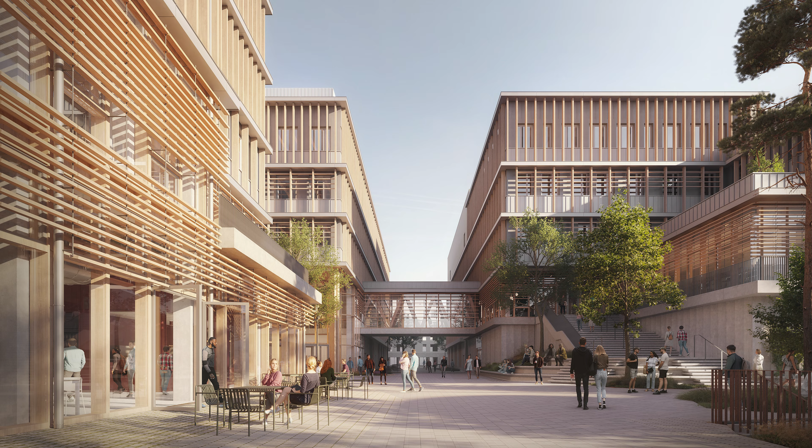The Campus Santé Franceline-Ribard project is quite special and innovative. The first of its kind in France, even in Europe, it aims to bring together the full range of healthcare training programs in a single institution.

The Nantes University Hospital Center, a new healthcare district, will include all human and animal healthcare schools and faculties.

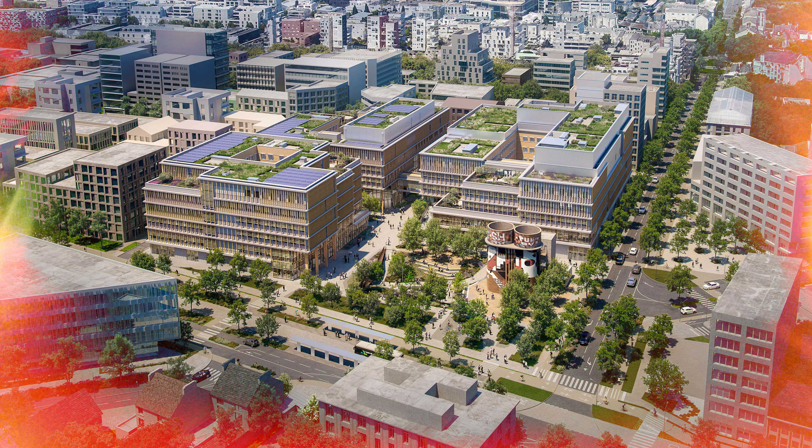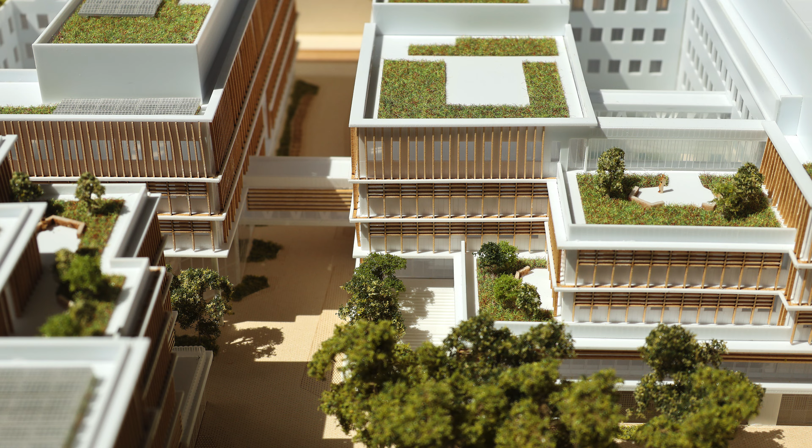The university campus is on the island of Nantes, very close to the future university hospital complex currently under construction. It will work both with the university hospital and the rest of the district, since the city of Nantes aims to create a healthcare hub of excellence around this university hospital project.

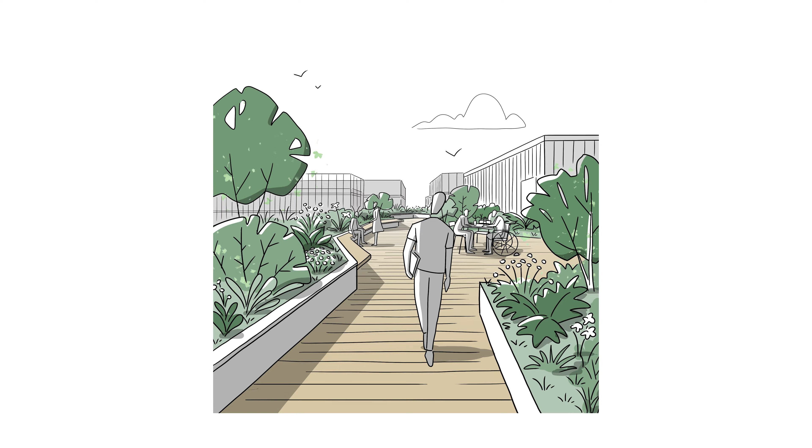The special feature of this project on the island of Nantes is the integration of mobility from the start, with the creation of a large green corridor for bicycles and pedestrians. It's an area of 44,000 square meters, on which there will be 3 buildings.

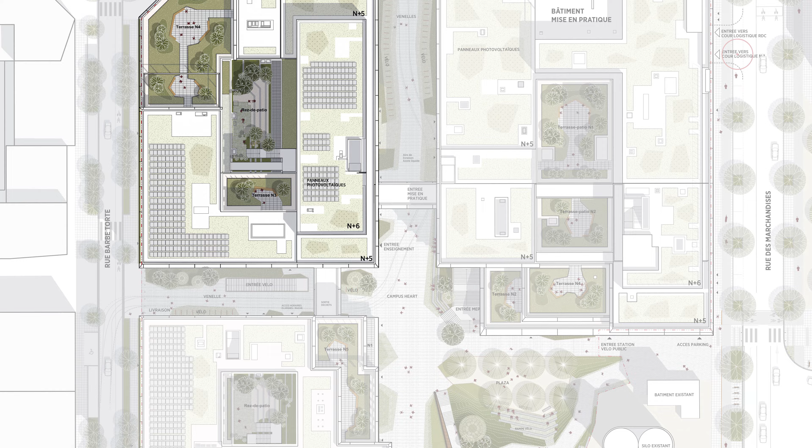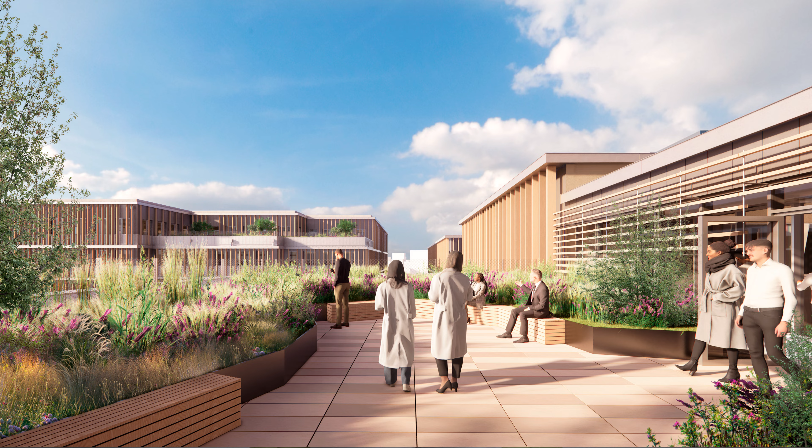There's the Campus Life Hub, with student and faculty living quarters. Next, there's the Teaching Hub with all the standard teaching facilities and lecture theaters. Then we have a more technical building called the Practical Training Hub, with simulation facilities, since medical studies entail simulation of doctor-patient relations and performing dissections, hence a simulation and research section.

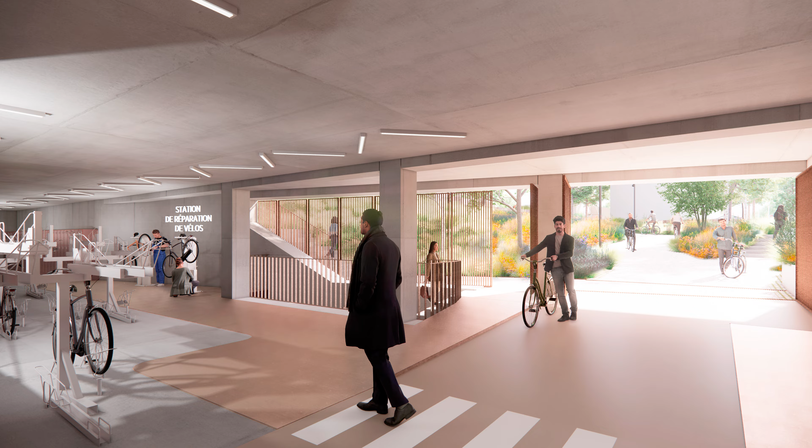The practical training hub also includes a university canteen serving 2,200 people a day that will serve students at this and other universities in Nantes.

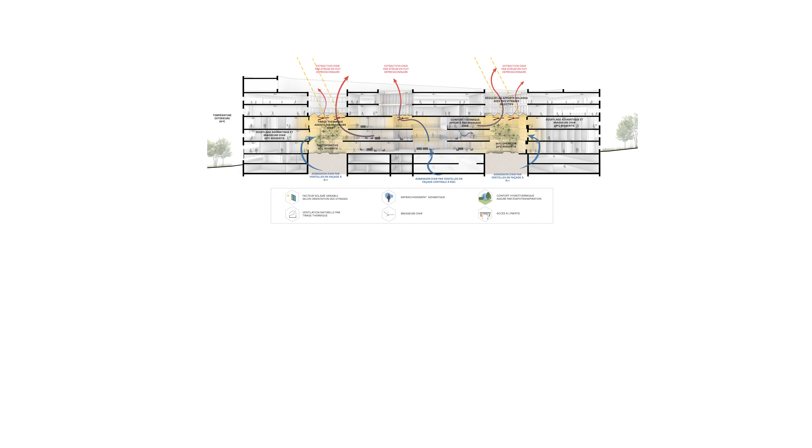It is a real place of the future for our children, designed to be hospitable, welcoming all those concerned and enabling them to work and live very complex situations with greater serenity. That's why we're so fully committed to this project.

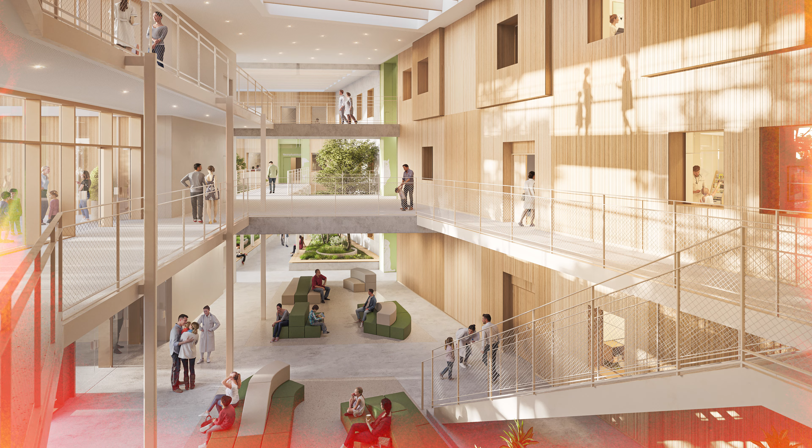The Children's Brain Institute is a very special project. Like the previous project, it's a first in the sense that this is the first time we are grouping together these programs in a single building.

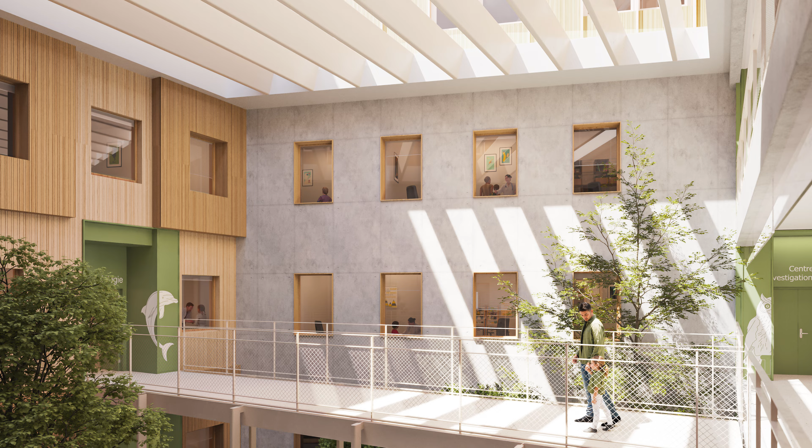We have children with brain-related conditions and their caregivers, of course, even if this facility is not a healthcare facility proper, but rather a diagnostic and research facility. So you have child patients, caregivers, applied research, and basic research all in a single facility, which itself is an extension of the Robert Debré Hospital in Paris.

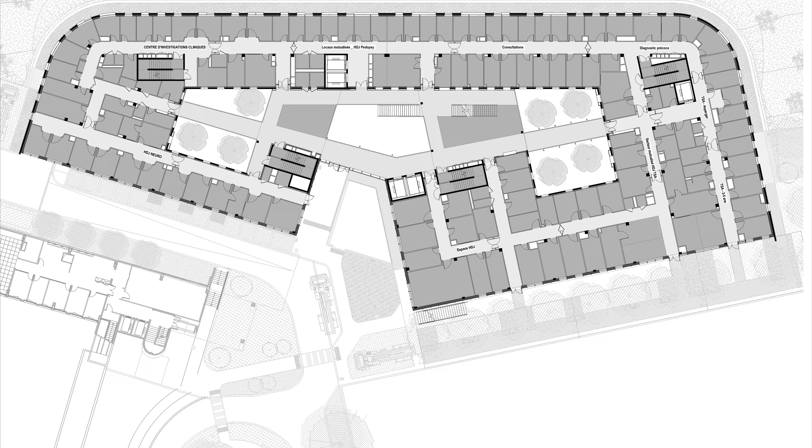It's also a very unusual site, wedged between the existing hospital, the ring road, and the city of Paris's drinking water reservoir. So it's a very small site. In fact, my first visit was a real surprise, a site running along the ring road on a slope allocated to a facility for children with health issues.

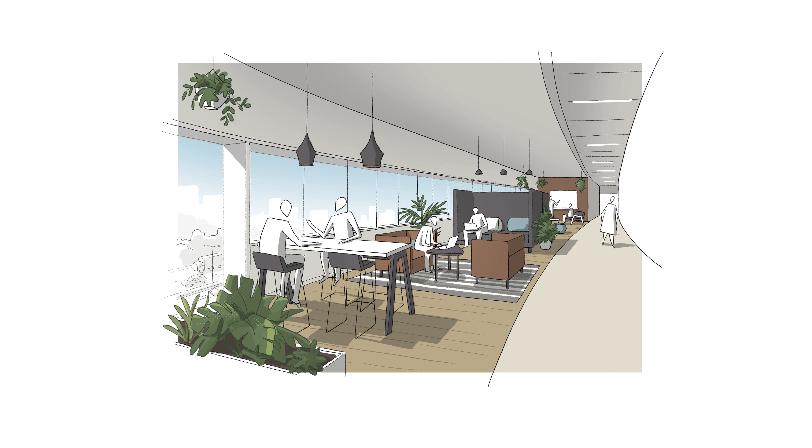But very quickly, our vision of the project design for the site took shape. We wanted to take advantage of the project's location in relation to the Ring Road, City, and Outer City district to enhance its visibility and also create a landmark.

So, the elevation facing the Ring Road has a very distinctive carved decorative effect that makes you wonder what's inside. It reminds some people of a brain.

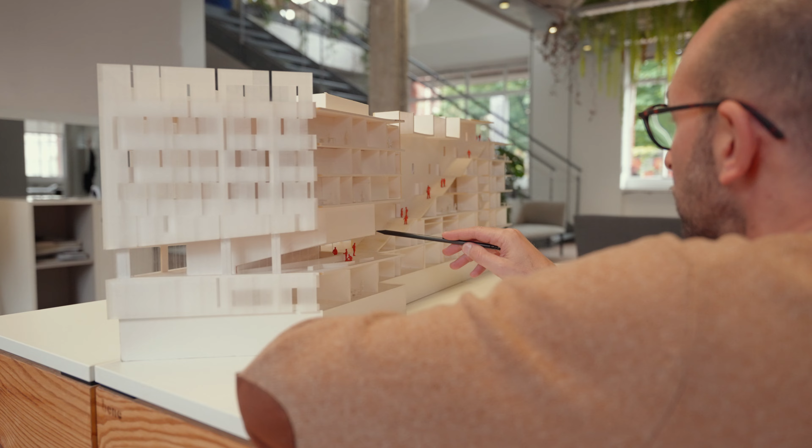The AIA Foundation was created in 2011 by the architecture firm AIA Life Designers. The company's goal is to conduct research in 3 areas: architecture, health, and the environment. Why these 3? Because we realize that health is a major factor in the equilibrium and well-being of populations.

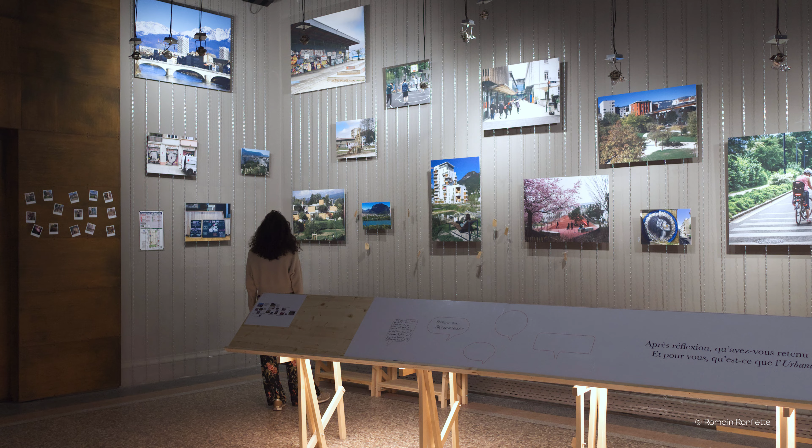The AIA Foundation is therefore a research platform that also looks into the subject of collective health. Although today we talk more about well-being, it's important to note that our research is mainly into the evolution of project methods - how a firm of architects, engineers, and urban planners decide at a certain point to address the question of public health, not simply in response to a hospital building brief, but going beyond that to consider achieving objectives like those defined by the WHO. This is particularly true when considering the families of health determinants.

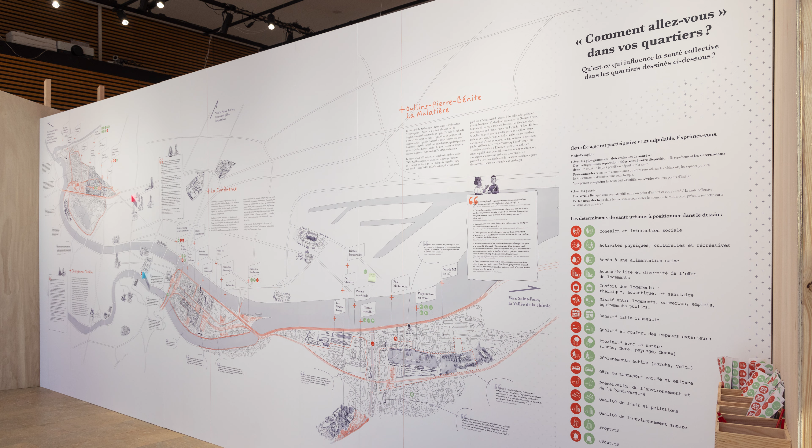Nor do we keep this knowledge to ourselves. We share it in the format of an exhibition called Comment allons-nous? How are we doing? That will be touring different regions. The exhibition was first shown in 2021 at the Venice Biennale, and subsequently in other regions. It is currently being presented in Lyon, sponsored by the local CAUE, the Architectural, Town Planning, and Environment Council, an organization concerned not only with involving the general public in questions of collective health, but also with showing how architects, designers, and landscape architects must themselves broaden their approach and include consideration of well-being and health.

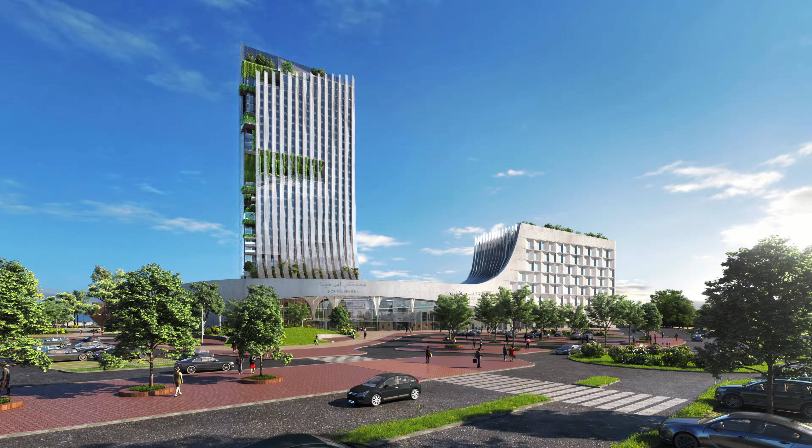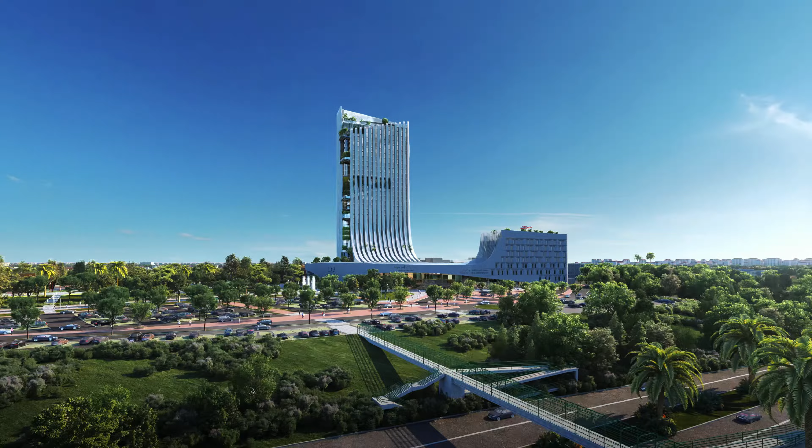For AIA, health issues cannot be resolved or merely summed up as a matter of finding a place where the sick are cared for. It's not just that. For AIA, it's about a truly comprehensive health project that includes physical, mental, and social health. It's an inclusive dimension involving creating spaces that will enable people, as far as possible, to feel better and get better. Developing an overall design concept is at the heart of these projects.

The IBN SINA project in Morocco is the second major project we have been asked to design in Rabat.

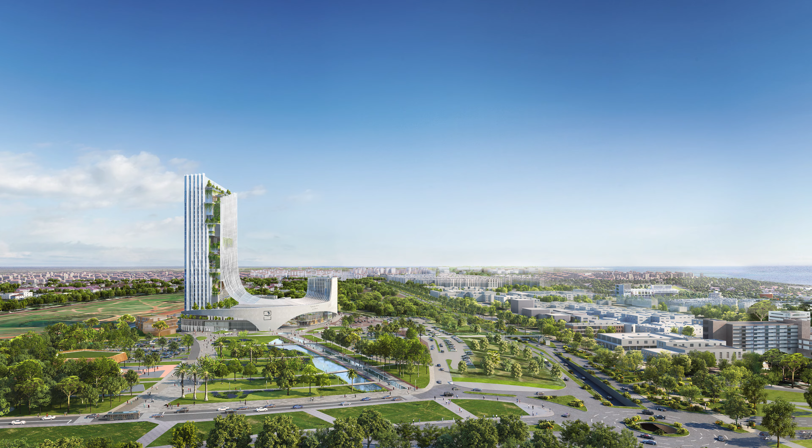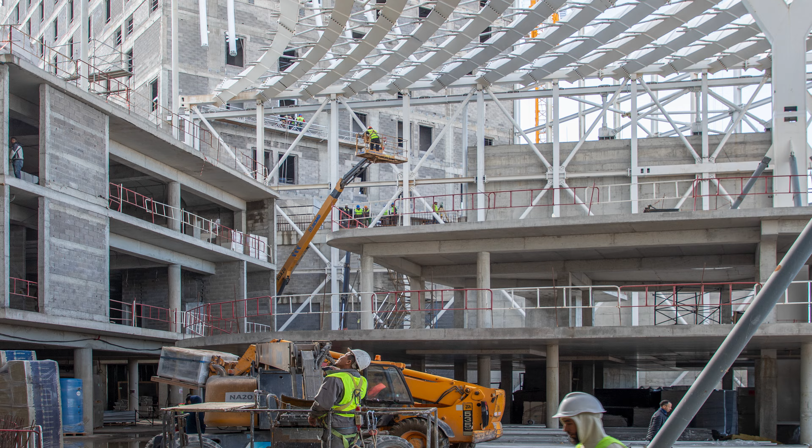It's a 280,000 square meters hospital located in the center of Rabat. It marks a truly decisive moment in AIA's international development. It is a very special project, entailing a fairly complex programmatic healthcare requirement - building a hospital in a tower, a program that does not necessarily lend itself to this typology. Why a tower? It allowed us to resonate with two other towers already in the center of Rabat and create a distinctive skyline with key landmarks for the whole city.

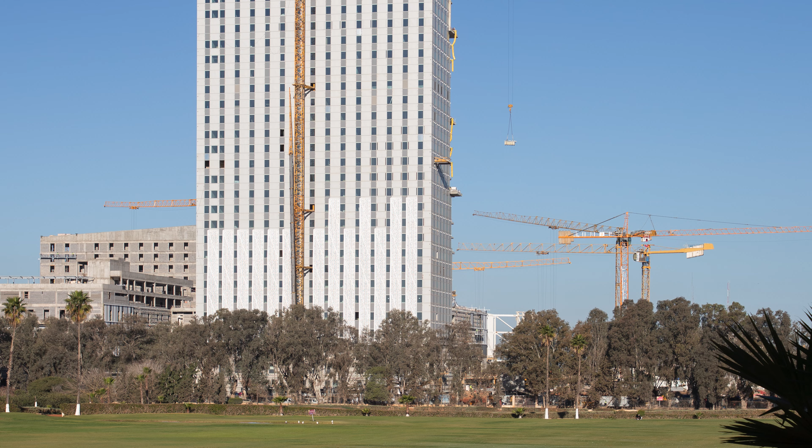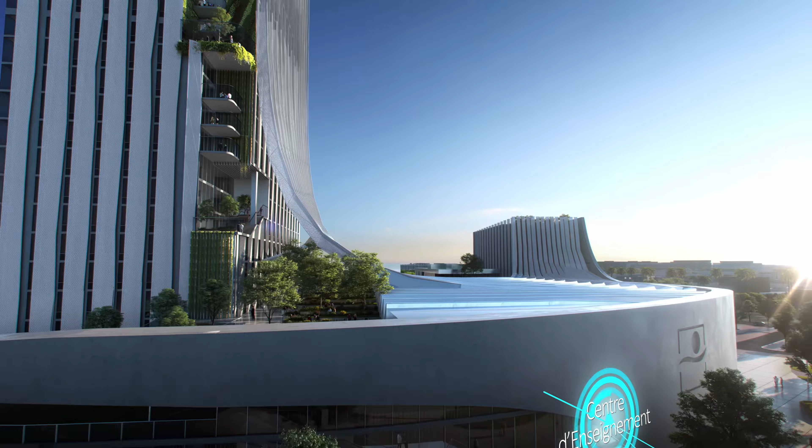However, you can't just build a healthcare tower with a series of pertinent programs and not include other elements. How do you ensure that this tower is different from an office tower? Our main answer was to create a continual green strip up the building. The tower opens out towards the city and the sea with a green continuum that starts from the landscaped approach to the Ibn Sina Hospital and rises up through the full height of the building through all the floors, opening up the tower to the urban context.

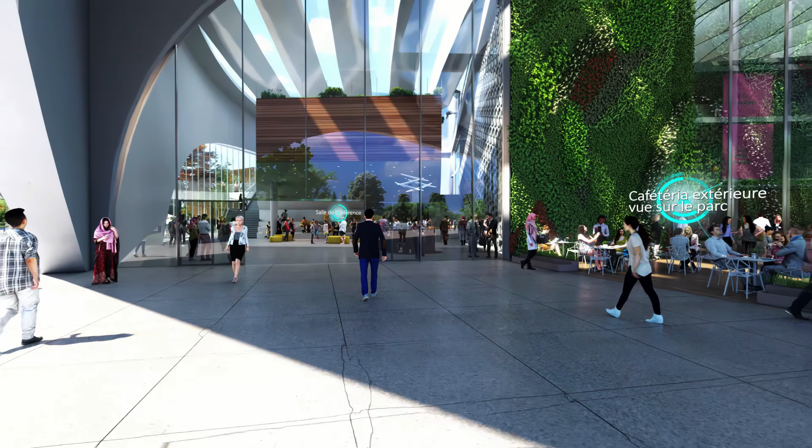This project will be both a hospital and a university where patients, researchers, and clinicians come together to provide innovative medical treatment in Morocco in the future.

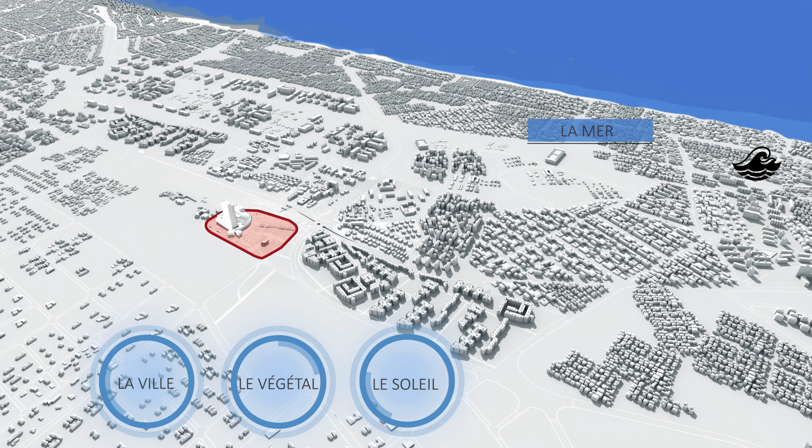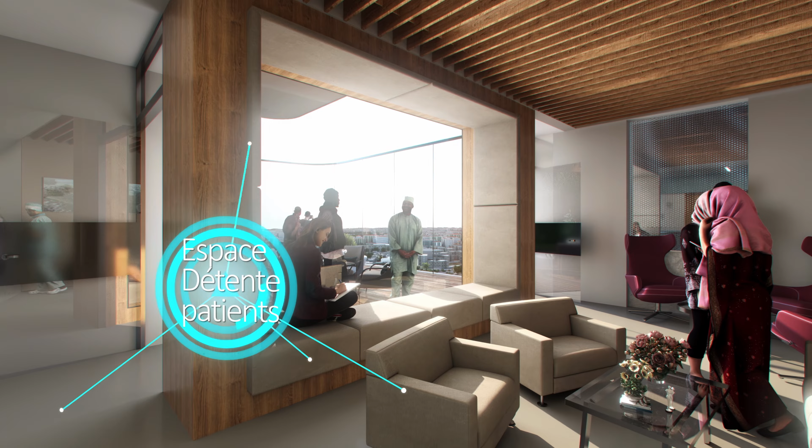The IBN SINA Tower was conceived to fit with the climate and the environment close to the city of Rabat. We talked about this green continuum that faces the sea and the city, but it's also a sensory design. On each level of the tower, this continuum of natural greenery mounting the facade allows people to step outside for some fresh air and enjoy a moment of relaxation.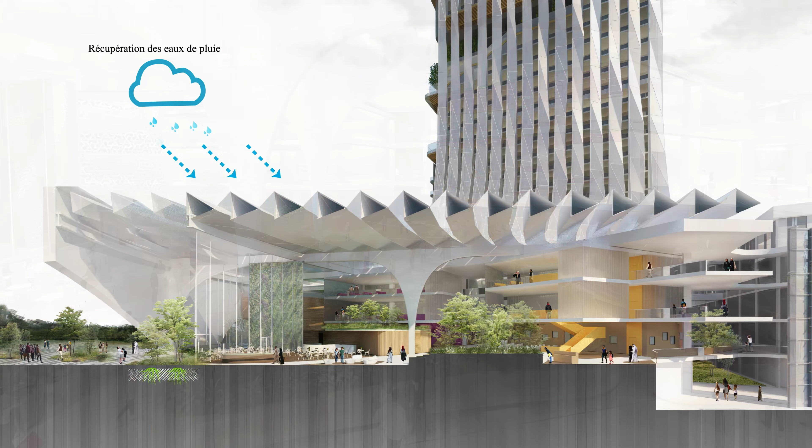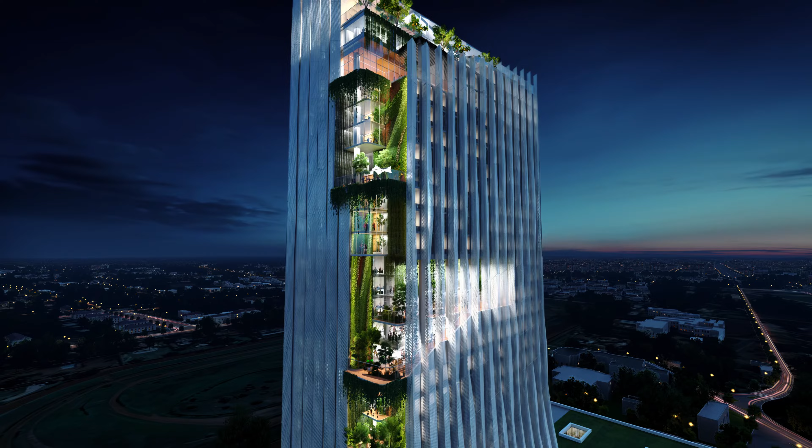The tower is characterized by its kinetic envelope that accompanies the facade from the main hall up through the full height of the building. In fact, the envelope can be described as an active skin - so much is going on. It allows natural ventilation, windows can be opened. The fact that you can open the window on any floor and get some fresh air is a strategic feature of the whole program. It's part of the sensory design to be able to know what the weather is like outside, what the temperature and humidity are at any given moment.

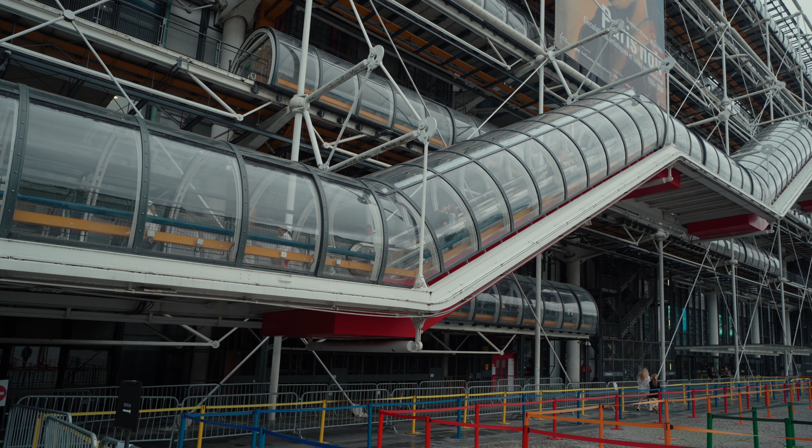The Centre Pompidou is evidently a hugely iconic project in Paris. A museum project where we are assisting the client with the renovation of this heritage site. It's really significant for us as architects to be involved in the project and work hand in hand with the Centre Pompidou teams.

Our work on this project consists of renovating all the facades, all of the networks, and reinstating the project to comply with safety, fire, and equitable accessibility standards. So it's a fairly complex, comprehensive brief involving all aspects of the building.

The centre will close for several years, during which we will take over and renovate it. We will give it a new lease of life for the next 50 years. By completely renovating all the mechanicals, plant and facades, we will allow the centre to look to the future as it was built, as Renzo Piano said, to last 500 years.

We don't claim to be building for 500 years. But what we do notice is that this building has many qualities, and that with new materials and today's technologies, we will be able to project it into the future and allow it to continue its mission of public service and culture for at least the next 50 years.

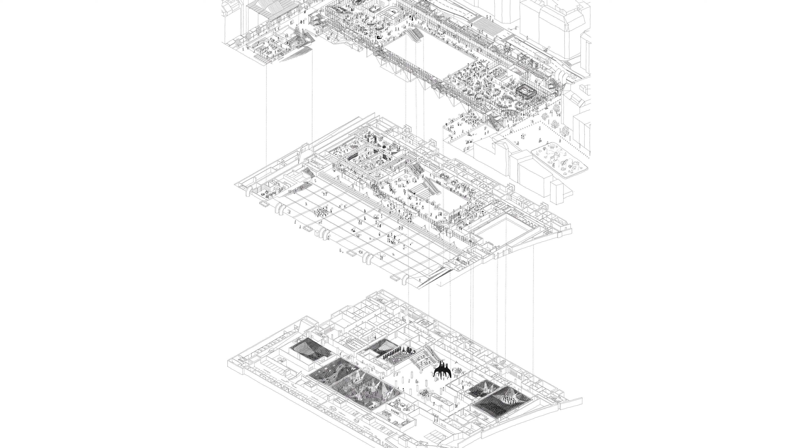It's such an extraordinary building that when you first approach it as an architect or engineer, you freeze a bit thinking, oh boy, what I'm doing is sacrilege. But we quickly got over that by adopting a method that ultimately involves embracing the philosophy of the original designers, which is to do something that is truly innovative while preserving everything that makes up the centre's DNA.

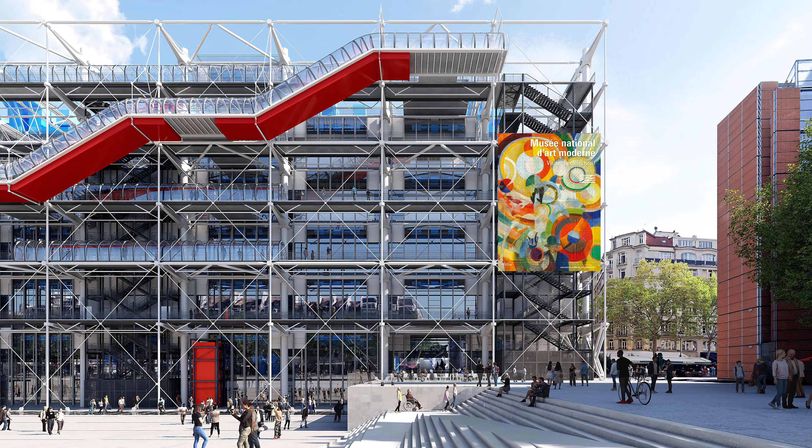Here, for example, we have a section of the facade. These elements are found every 1.25 meters and are 7 meters high. They are called stiffening columns and serve to reinforce the facade from the outside. They're a prototype and exist only at the Centre Pompidou and nowhere else.

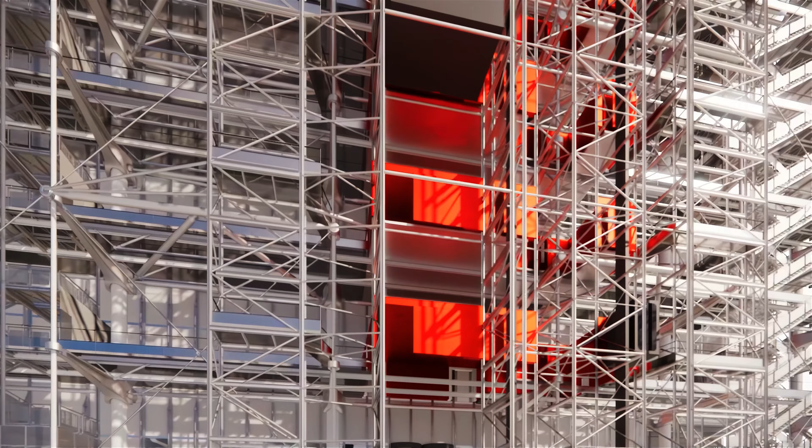The facades are no longer compliant, misted over, sometimes containing asbestos. Our job will be to restore and reinstate them. To do so, we'll preserve as many components as possible: the stiffening columns, what are called the U-profiles here, and the anchoring pieces made especially for the operation.

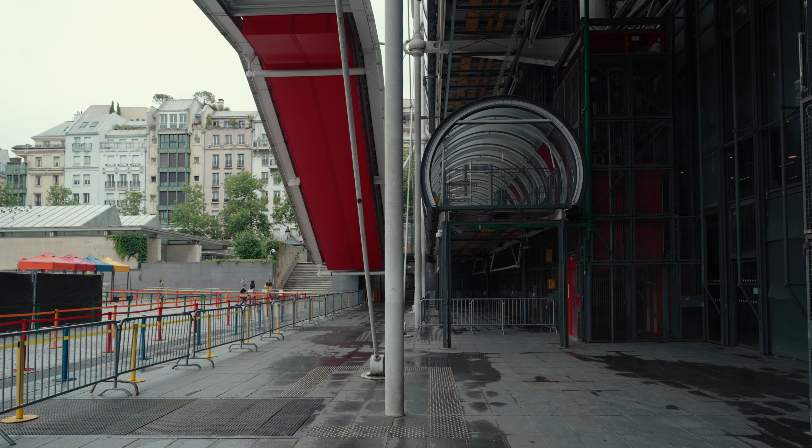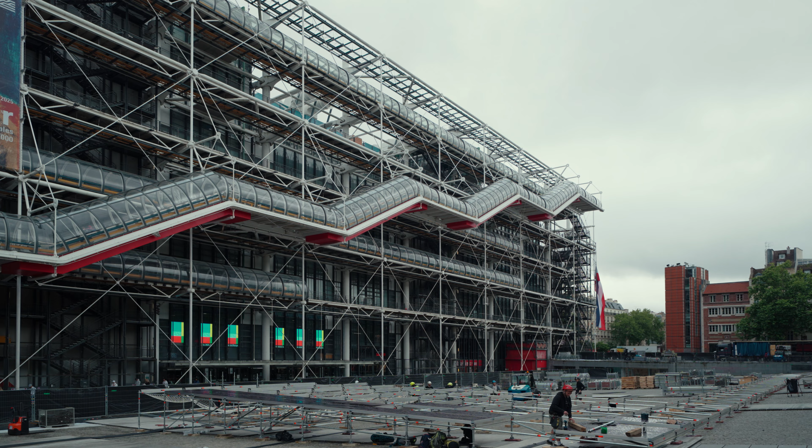We're going to remove the glass and replace it with today's new high-performance glazing, at the same time taking the opportunity to clean all the joints and anything that may contain hazardous materials. These are some examples of the work we'll be doing on the centre, preserving as much as possible. All these elements are in very good structural condition, and we'll replace only what needs to be replaced.

Today, architecture is undergoing a major paradigm shift. The city is already there, and we have to rebuild on top of it. That's one of the main challenges facing the environment. It's about working with what's already there, building the city on top of what's already there to regenerate it. This is how we try to bring a new perspective to our projects.

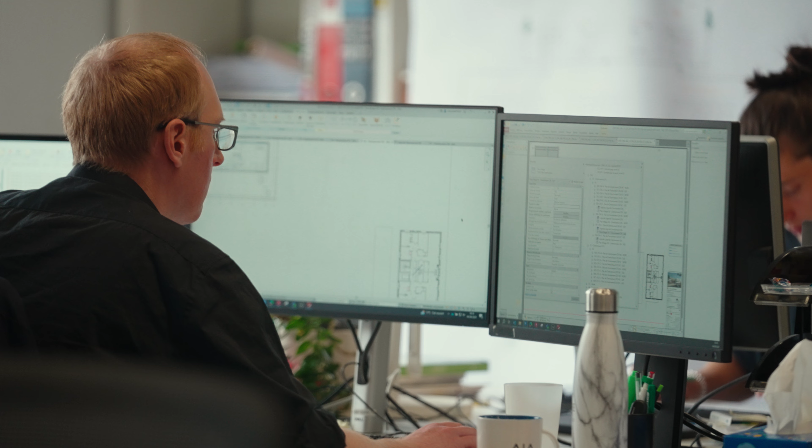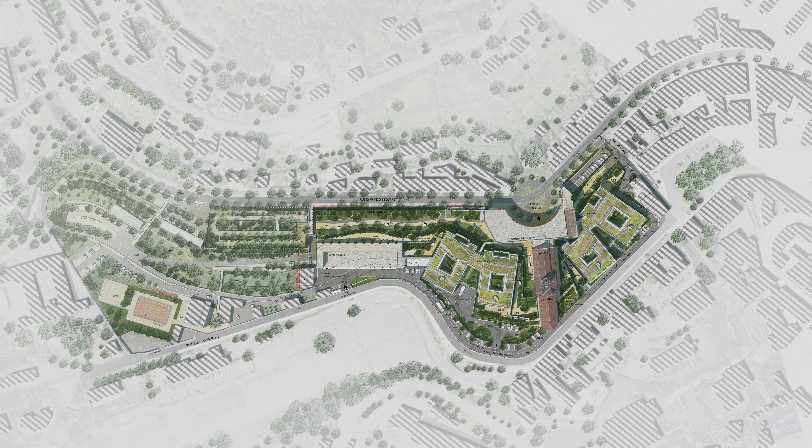You could say that it's a co-design project with an architect who came before. It is like going back to the past. I find that fascinating because discovering the work of another architect is culturally very interesting. You delve into the history of architecture, the approaches to design, methods, and construction techniques. You learn a lot—it's really a question of dialoguing with a work that has already been created.

Today, we are organized around units grouped around AIA Environment, which allows us to address these issues in all our projects, whether they're certified or not. Today, our environmental engineers are involved from the get-go, from the very first pencil stroke.

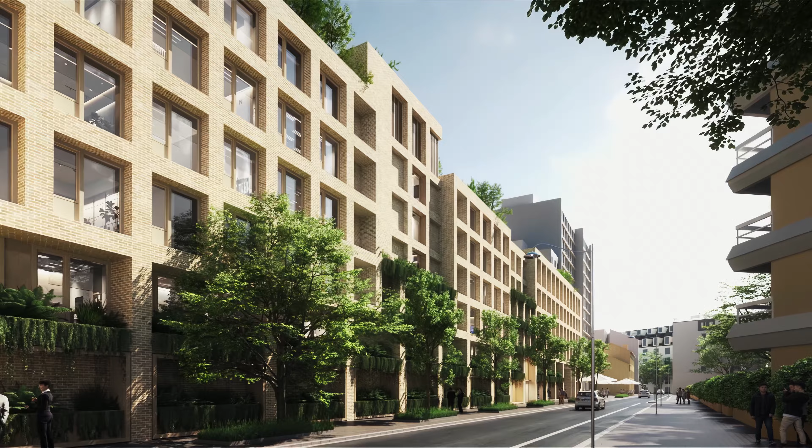The DRIEAT project on Rue Miollis in Paris is a major urban regeneration project where we have to rebuild on what already exists, work with what's already there. It's a project that sums up the future of architecture very well.

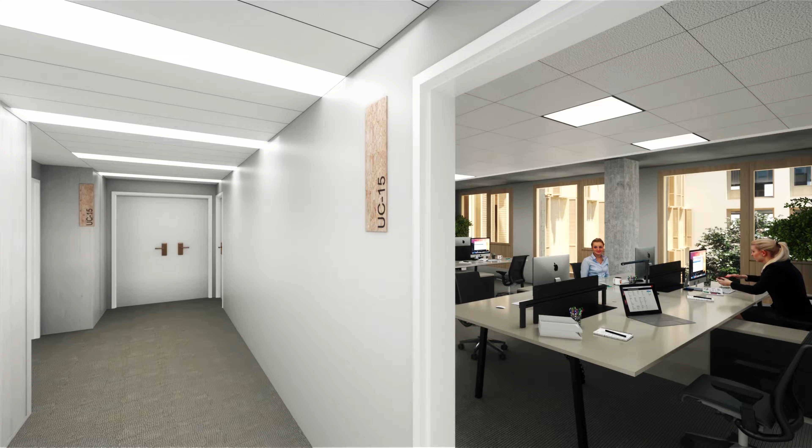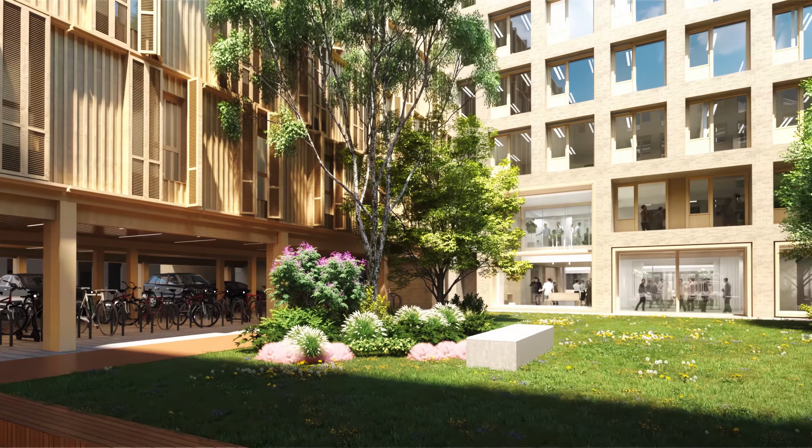There are 3 objectives. There's the concrete goal of modernizing the building, especially in terms of energy efficiency, consumption control, and systems to meet tomorrow's environmental requirements. There's the question of occupant workplace comfort—that's the second major objective. And then there's also the broader urban issue of renewing the image of this administration and its dialogue with the city.

And around these 3 major themes, there's also an important focus on densification. Today, there are around 600 people working on the site, which will rise to 1,000. So densification and, at the same time, high environmental expectations.

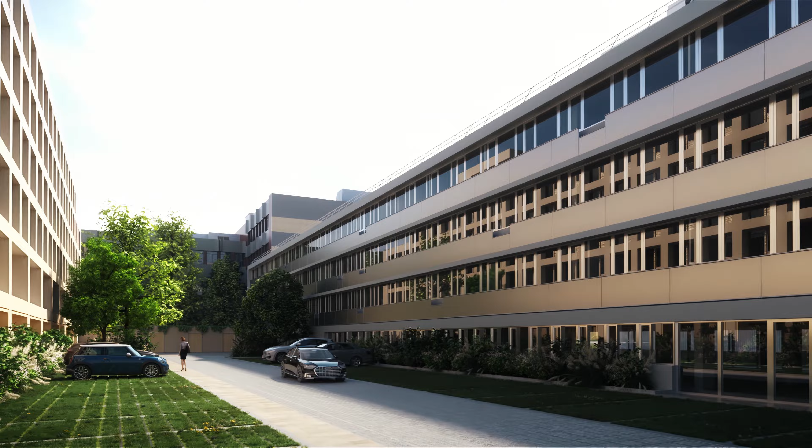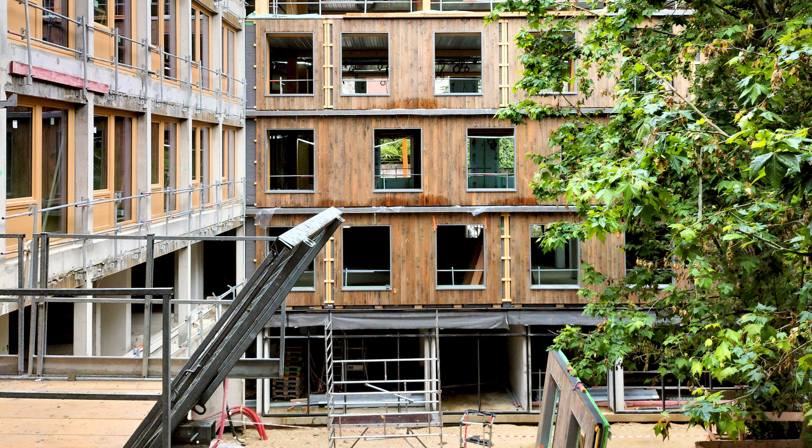There's the existing part and a new part, an extension. For the new build, we have implemented very low-carbon construction principles using wooden facade frames with wooden cladding and bio-based insulation. We have deliberately set ourselves a very ambitious goal in terms of materials and construction techniques.

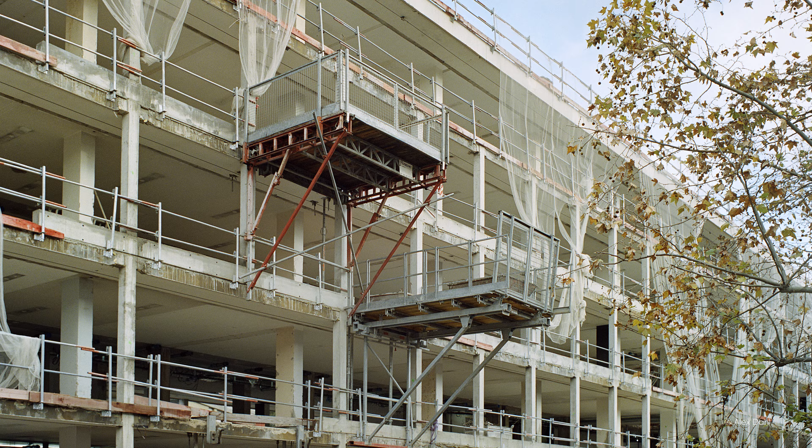For the existing part, the goal was to retain almost all of the existing structure, reusing what was there and not deconstructing or demolishing anything, rather enhancing as much as possible. We again used bio-based materials and generally implemented low-maintenance air filtration, heating and cooling techniques, and passive and low-consumption systems to have a building with really low running costs.

The CNAV project, the National Pension Fund, is a renovation project covering more than 20,000 square meters in Paris, part of which dates back to the 19th century, the other part from the 1950s. This is another large-scale regeneration project working with existing structures and addressing issues such as energy consumption and creating new workspaces.

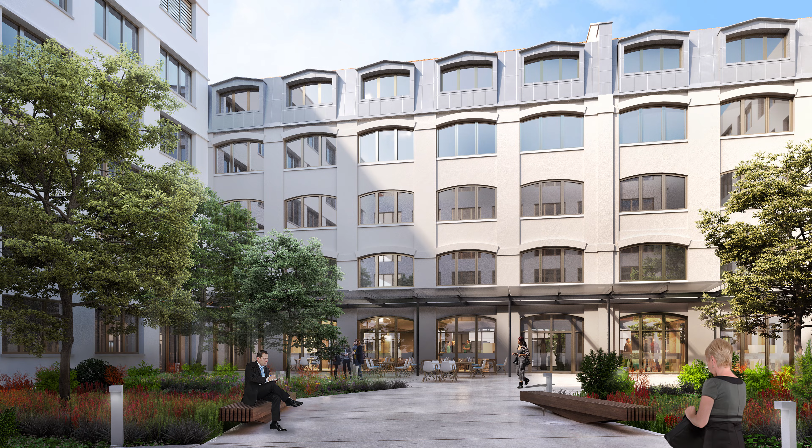The project we call CNAV, the headquarters of France's National Pension Fund, concerns the central management location of an organization with branches in all of France's regions. The headquarters are in Paris on Rue de Flandre. Here again, it's a very interesting site since, like other projects, it occupies a city block. In addition, it's not just one building, but a fairly diverse group of structures dating back to the 19th century, including a building that was formerly the Erard Piano Company, a French piano brand that once had its piano manufacturing workshops there. A complex situation, therefore.

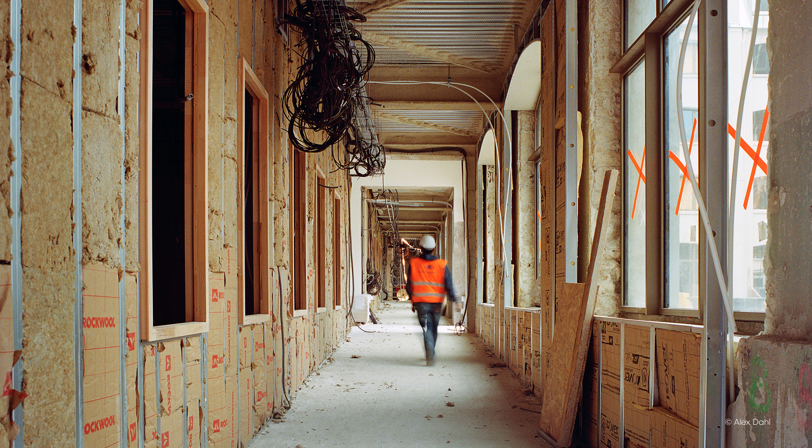The program again involved energy renovation and improving CNAV employee workplace comfort. Then there was the preservation and restoration of an existing building, which, although not excessively altered or damaged, had not been maintained, kept up, or cared for, and was showing significant deterioration. In a word, there was a need to clean up and restore the site's lost coherence.

The Hotel de Broglie for the National Assembly is a heritage project where we unpackage the site in order to offer new workspaces for members of the National Assembly. It is a rather unique adventure in terms of the type of architectural intervention.

The Hotel de Broglie was originally a private mansion built in 1720, so dating back more than 300 years. The project was for the National Assembly. The profession or role of parliamentarians has changed considerably, and today they need a team of assistants, but the actual offices did not offer comfortable or even acceptable working environments.

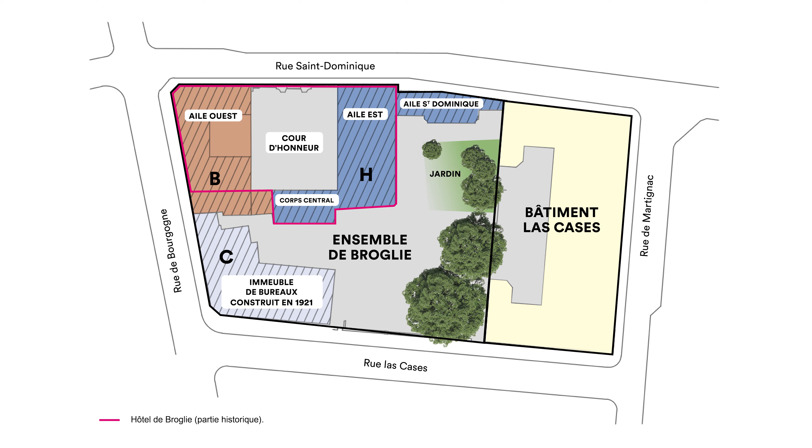The building, dating back to 1720, had undergone extensions and alterations up to the 19th century. Previously, people had felt free to demolish and rebuild. A very carefully planned intervention was therefore needed.

In addition, without going into detail, there were regulatory, accessibility, and reinstatement requirements. Integrating all these constraints was a major challenge in a building where we needed to minimize our impact, fully aware of the structure's history and everything that had happened over two centuries.

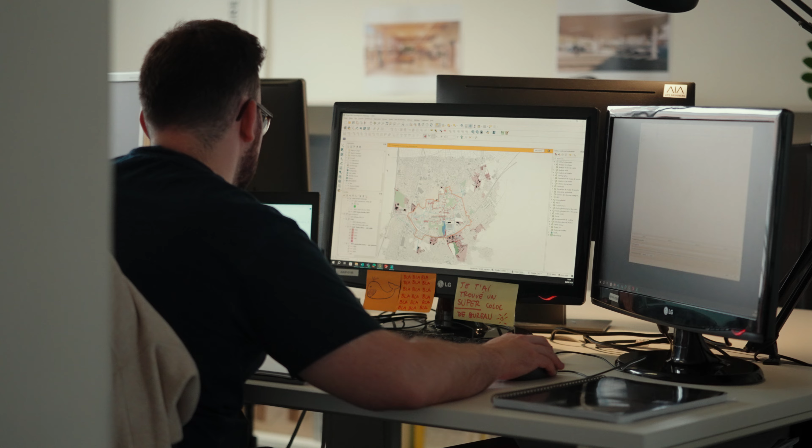The architecture of tomorrow will certainly be different from that of today. We are increasingly gravitating towards the large-scale regeneration of sites, brownfield industrial sites, and urban sites. So the proposal we will make will certainly be different from the approach we might take today. We will have to work with what already exists, considering the land. We will increasingly be questioning ourselves about the regeneration of living things, the land, and our regions.

The major challenges for the agency are twofold. On the one hand, the future of our organization and who we are as a company. Being 780 co-workers in an architecture firm today means we must think about how to sustain our company, how we are going to collectively succeed in meeting all the challenges that await us, while keeping architects at the center of our projects.

This is a real challenge for us today at the group level. And then there are obviously other challenges: how to continue to develop our commitments and always respond collectively to these projects at a time when the construction industry is undergoing major changes and facing significant challenges, and resources for projects continue to dwindle. The question is, how can we find different sources of funding for these projects? These are the questions we are asking ourselves today, and the group is working as a collective to find the answers for tomorrow.